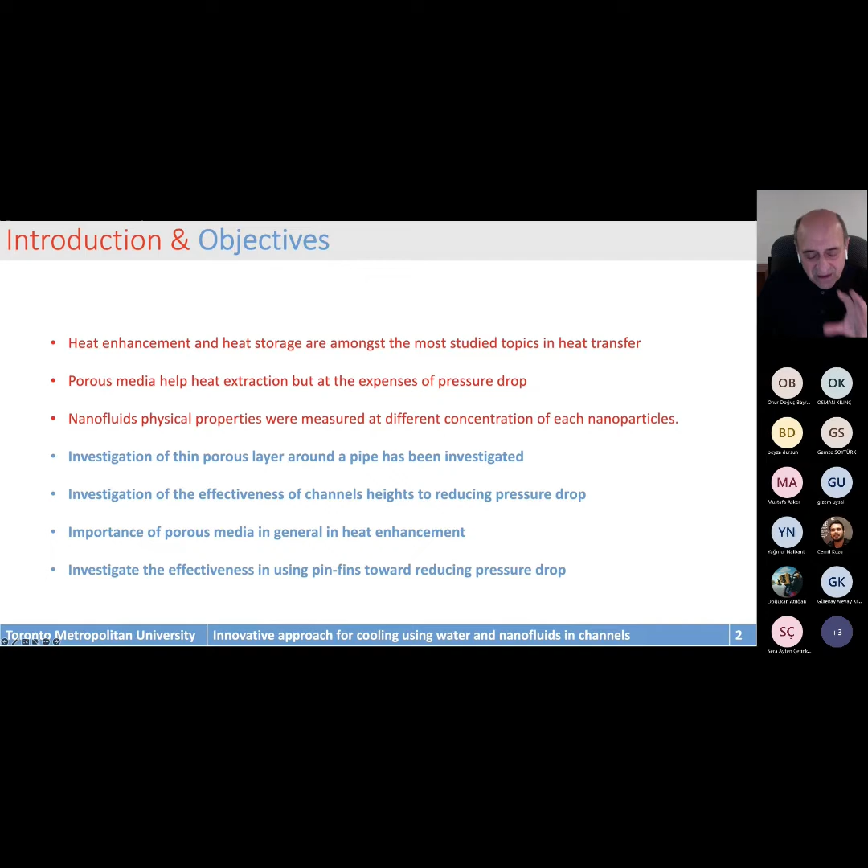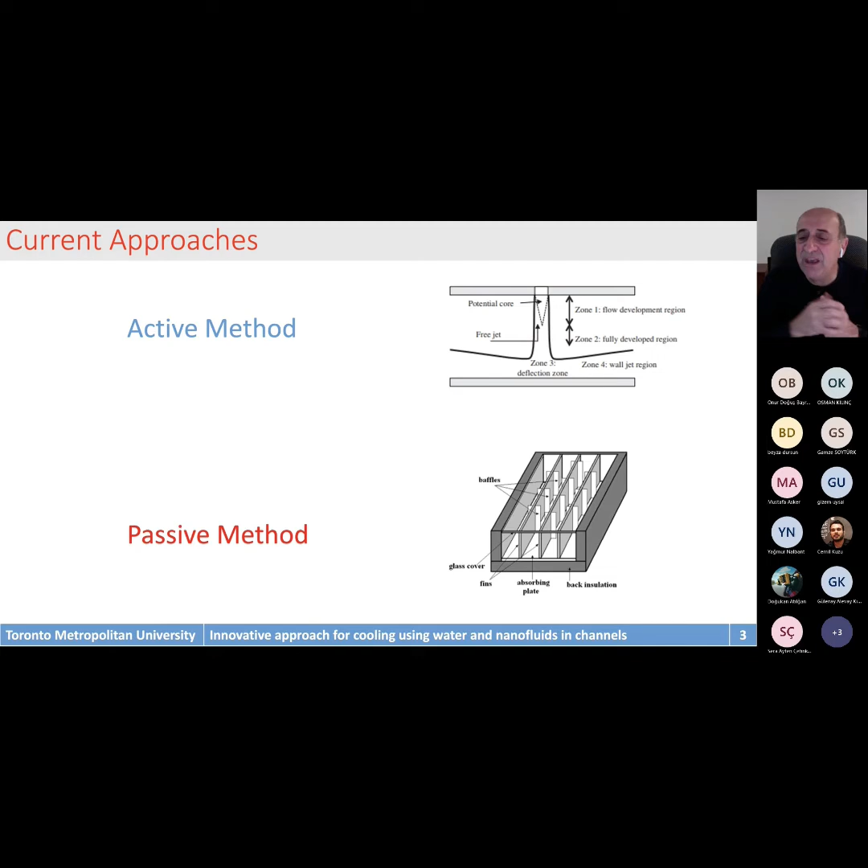Just a quick reminder, there are different types of methods for cooling. The active method, one of them, is jet impingement, and this is what one of my PhD students is doing right now. They use jet impingement in order to cool a certain surface. The fluid could be water or could be nanofluid. Or we have the passive method where we use some fins and let natural convection take away the heat from a hot surface.

Now, on the active method, people have used jet impingement with channels, whereby the channels act like fins or mini channels. They take the heat away from the bottom of a surface, and then the jet impingement cools them down. Or instead of putting channels, they use porous medium. You can use porous media with high permeability and be able to extract heat using this technique. Or with the passive method, you let it go by itself again using natural convection.

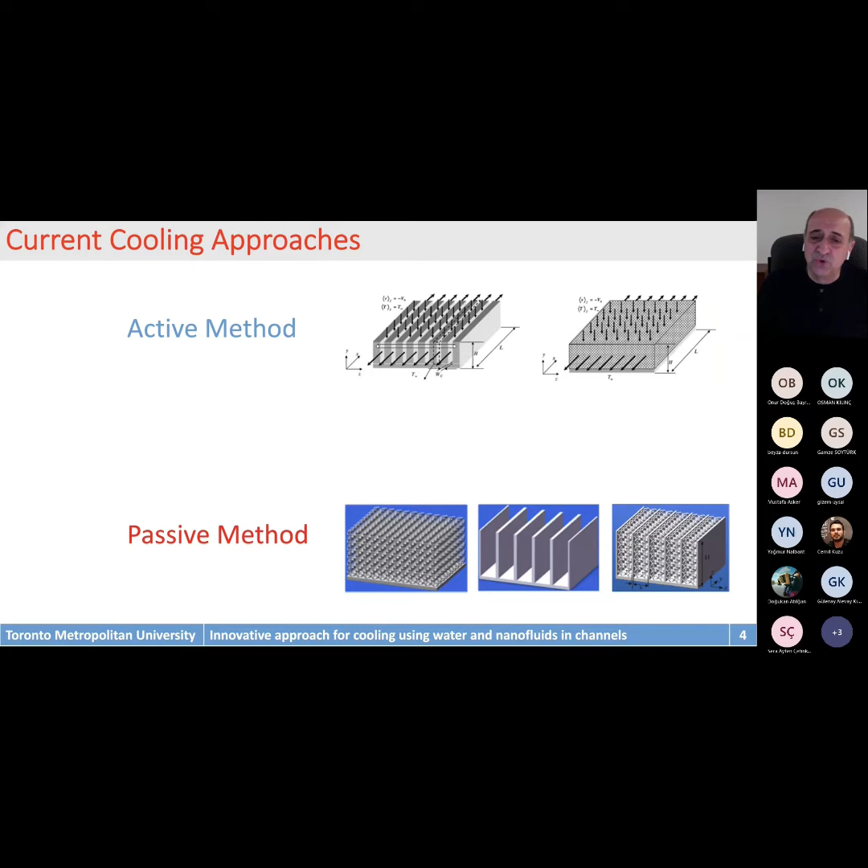However, more and more we see more interest in rapid cooling. Therefore, forced convection is the suitable approach for this particular application.

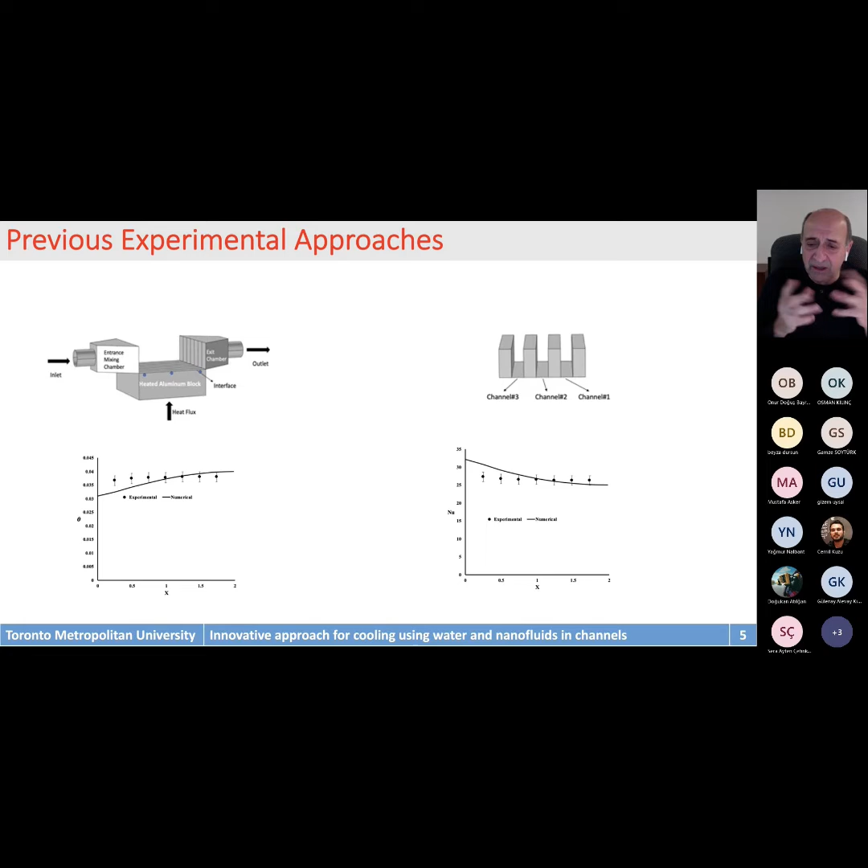We've done some experimental work in channels, with the channels having 5 millimeter openings, and the dimension of the experiment, which you see on the left-hand side, is equivalent to a computer chip, 3 centimeters by 3 centimeters. So we've done some numerical and experimental work for those particular cases of channels, and we had good agreement between the experiment and the numerical, which helped us calibrate our code. Usually for our numerical part, we use COMSOL software, which is a commercial software available in universities.

We also put inside those channels some porous media, and then we did some experimental work as well. Again, with porous media, depending on the permeability—here it's aluminum, and the porosity is 0.9—we were able to extract more heat than with regular flow in a channel.

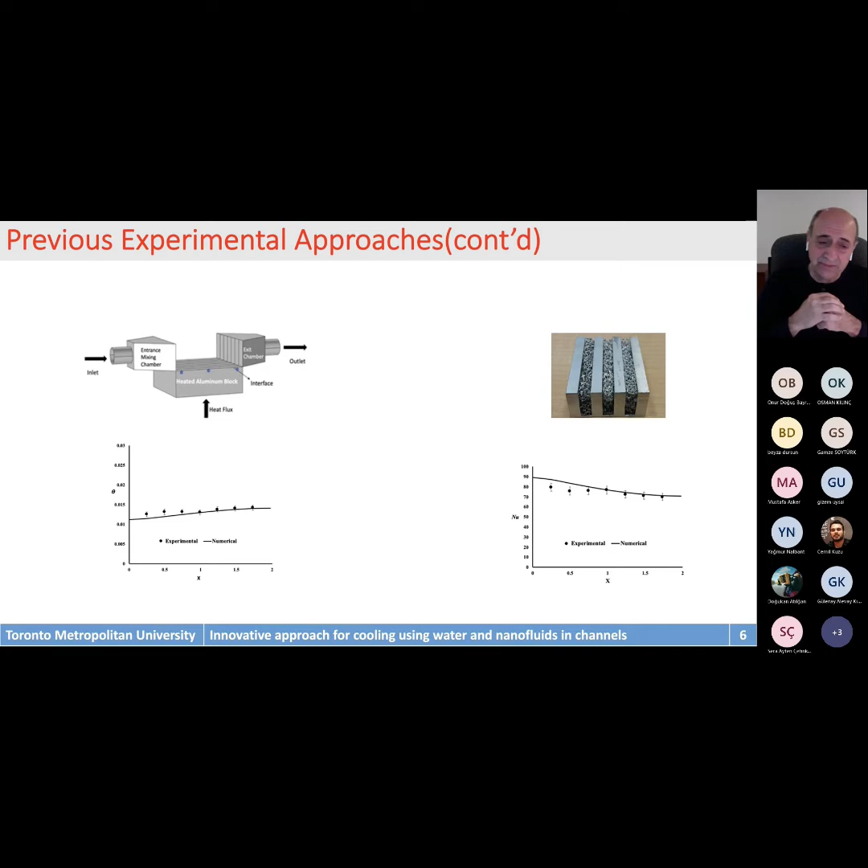Then from there, I would like to start taking you slowly into the four studies which we did. One of them, we tried to use nanofluid, and here the nanofluid we use is aluminum oxide with water, and we had different types of applications.

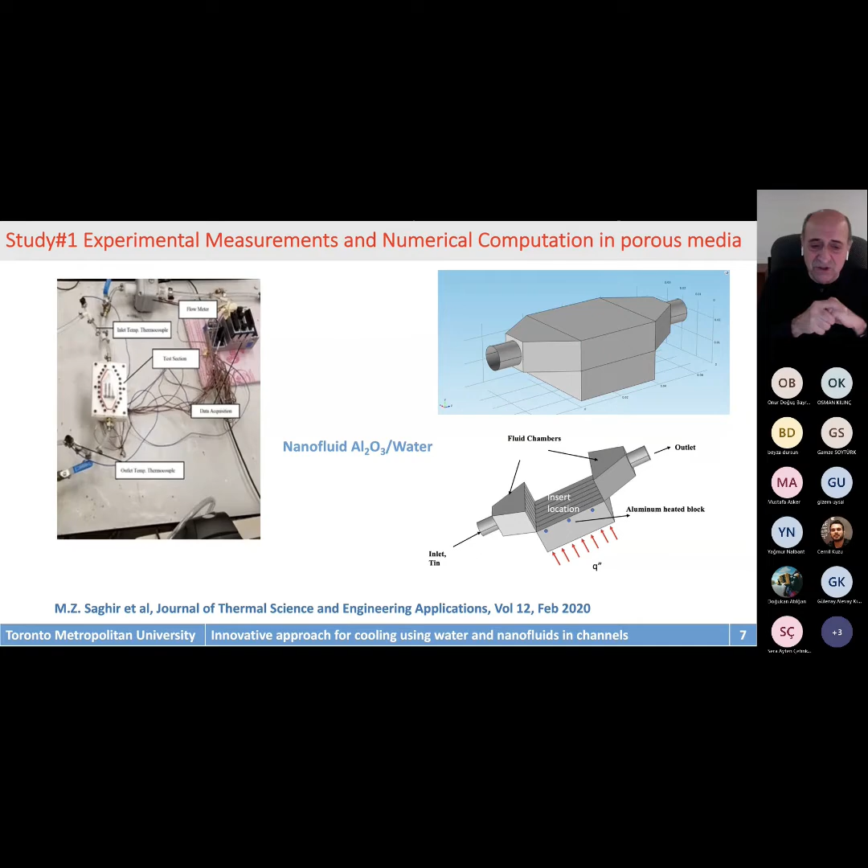One of them is the porous channel, which I showed you earlier. In this particular one, it's a porous block, 3.7 centimeters in both directions since it's square, and the height is 12.7 millimeters. The work for this one has been published in the Journal of Thermal Science and Engineering Applications, so I'll go into detail with this one.

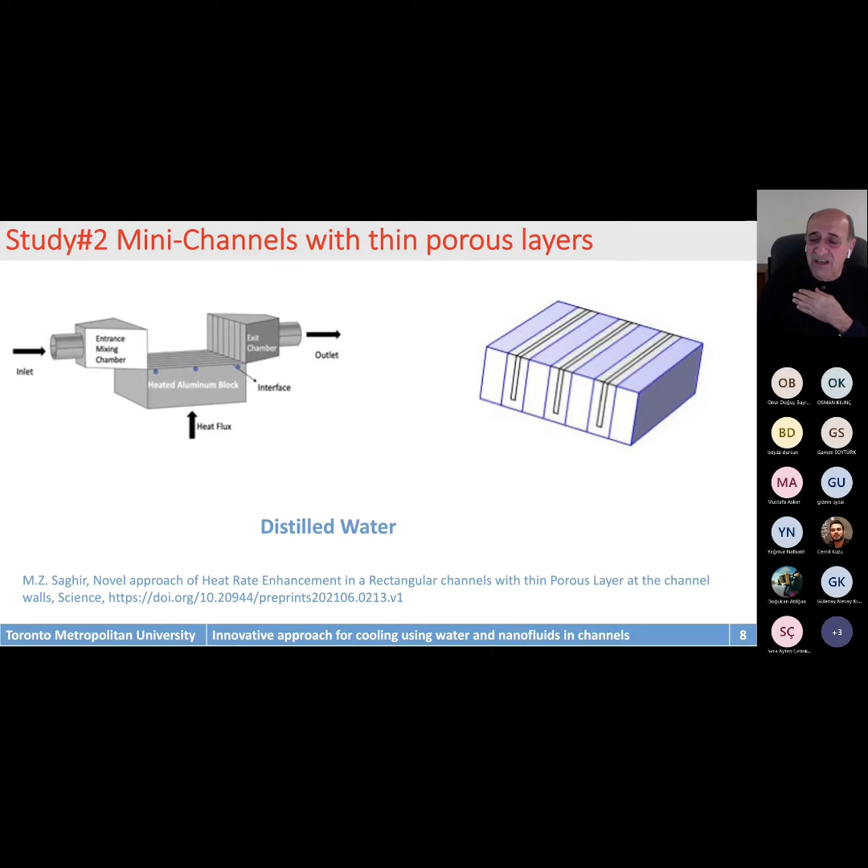The second study is where I reduce the channel by putting a layer of porous media at the side of the channel. The reason behind it is I want to reduce the pressure drop, because a porous media creates a pressure drop. This one was purely numerical, after we calibrated our code with experimental data, and we published it in a Science journal not long ago.

The third study: we said, if pressure drop is the problem, what about instead of using channels, we use pin fins, circular or rectangular, which form channels by themselves. The reason behind this study is I would like to allow the flow not to go only straight through the channel, but circulate between the pin fins, with the hope that this approach creates more heat enhancement. That's the goal of the study. We published a chapter in a recent Taylor and Francis publication related to heat enhancement.

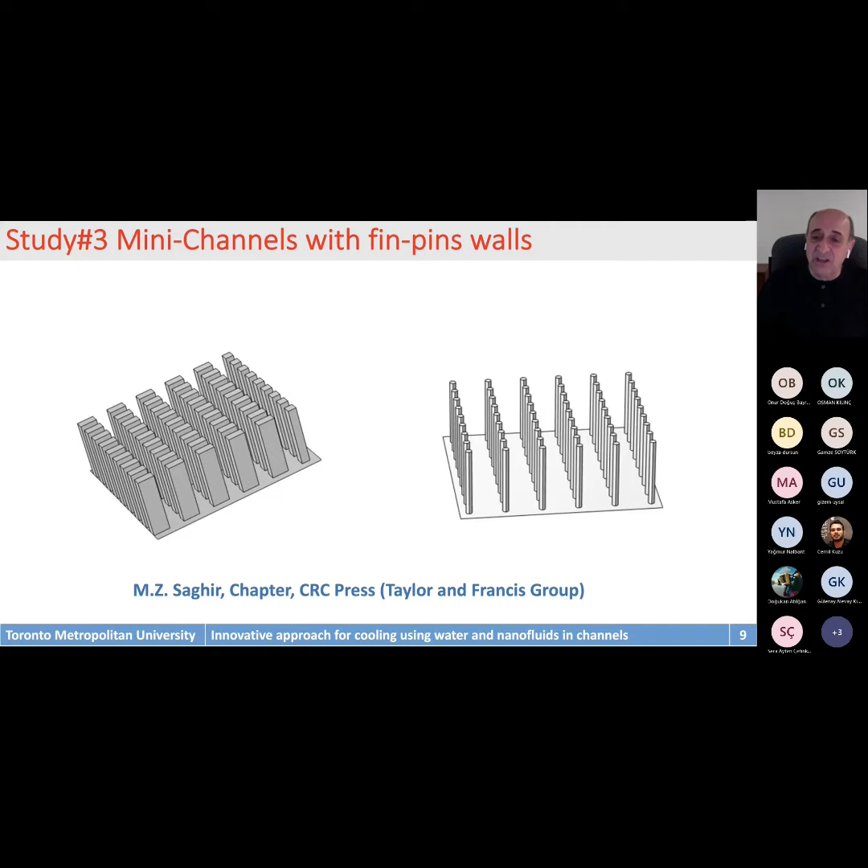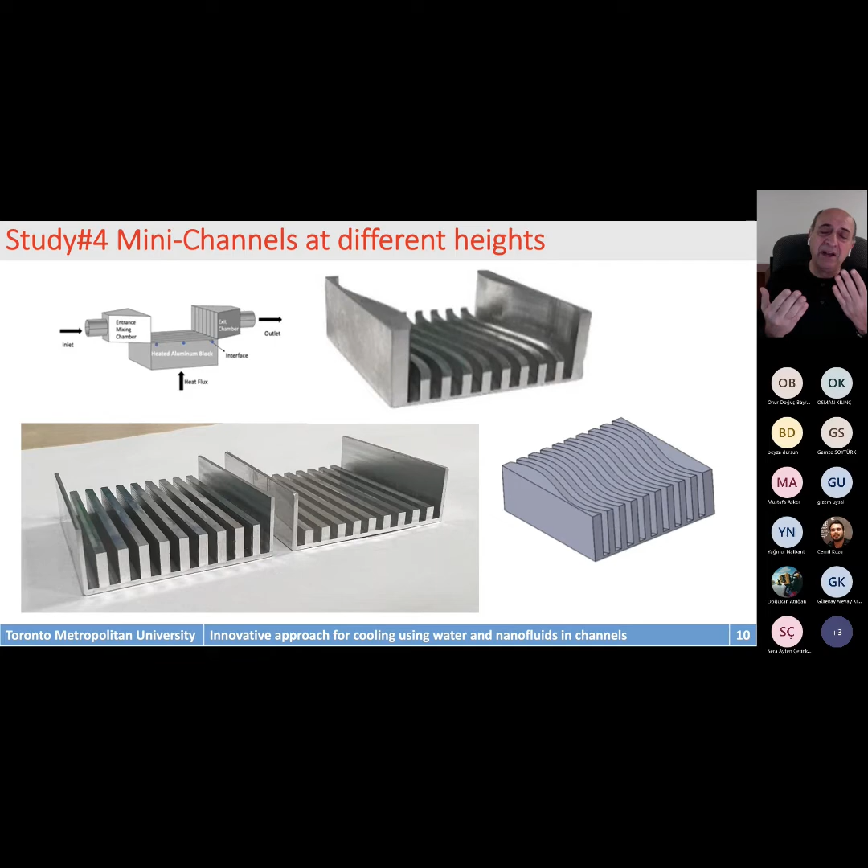The fourth study, which we are currently doing, is about the height of the channel. Although the cavity where the flow circulates remains constant, I would like to vary the height of the channel to see if there's an optimum height we can benefit from. We are doing two types of experiments: wavy channel and straight channel, both made of aluminum. I'm also showing you the model, which we are doing numerically, so in parallel we do experimental and numerical work.

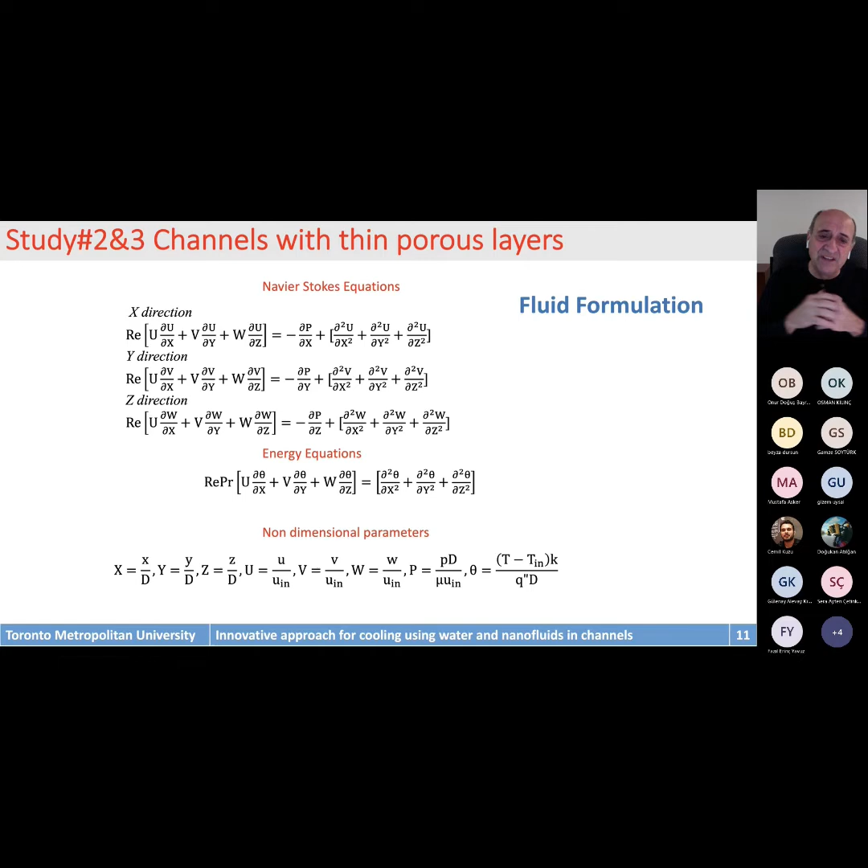For the numerical side, I won't go into detail, but basically we solved the full Navier-Stokes equation in three dimensions, and for the porous formulation we used the Darcy-Brinkman model.

I'd like to stop for a second and show you a future project we're doing now, running experiments as we speak. Instead of buying a porous material and telling the numerical model we have a porous equation, we use 3D printing. Working with the architecture department, we designed a porous medium, did a 3D print of it, and now we are doing experiments with that.

On the numerical side, you don't need to solve the porous formulation. Instead, you select the model as being solid, with openings between the solid where the fluid circulates. This is a new approach to dealing with porous media, and I'll go into a bit more detail at the end, since we don't have data yet.

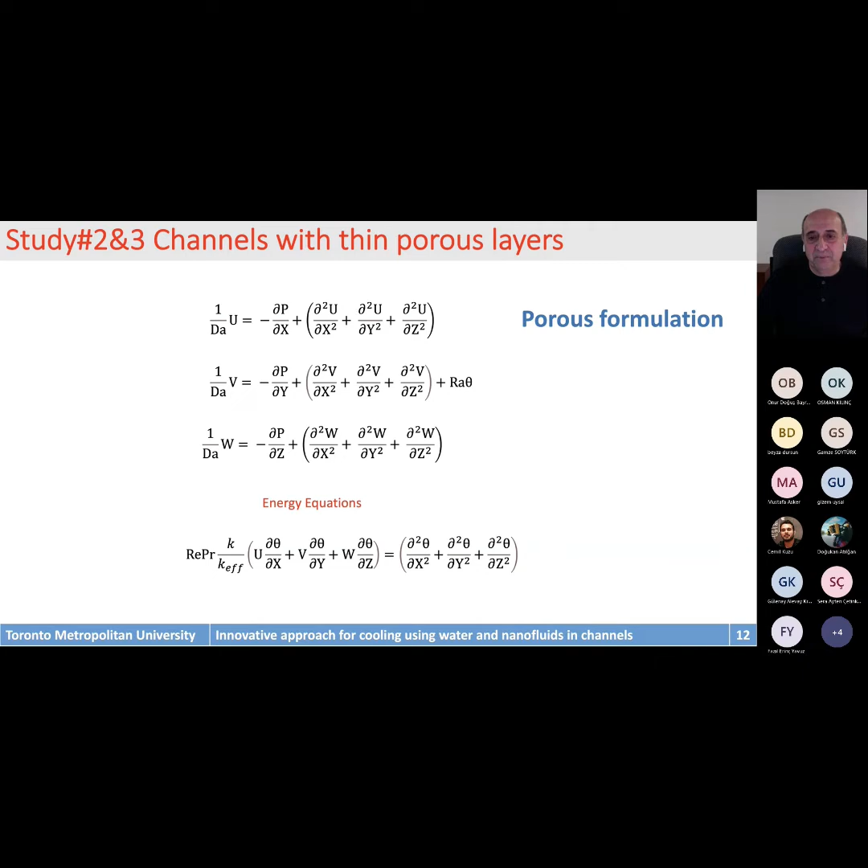Now, regarding study number 1, we did experimental measurements for different heat fluxes. To remind you, study number 1 was a porous block. This porous material can be bought from industry with a porosity of 0.91 and different permeabilities depending on what you need. We selected 10 PPI, 20 PPI, or 40 pores per inch, and tested different flow rates.

One important thing to mention: when you put the porous block onto the hot plate, we usually apply thermal paste to ensure good contact between the heated block and the porous block. However, in numerical modeling, you must model this interface, and by doing so, you can calibrate your thermal resistance for one case and use it for the entire correlation between experimental and numerical results.

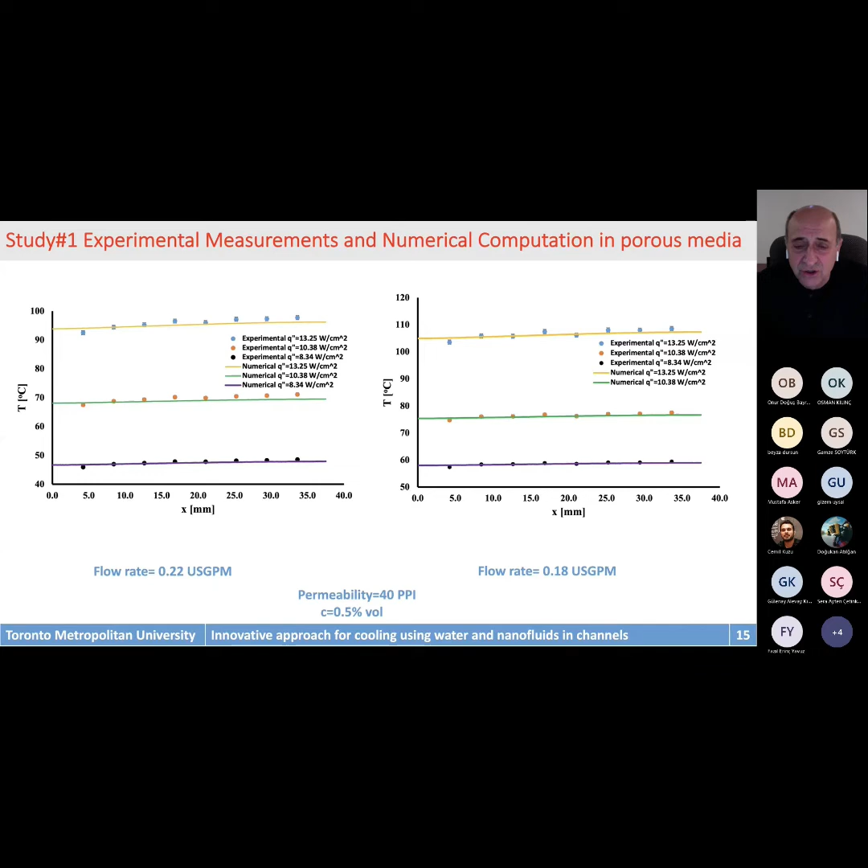We also did it for a variety of nanofluid nanoparticle concentrations, between 0.1% and 0.5% volume. One thing to remember is when you use nanofluid in your flow, after finishing your experiment for the day, you must clean the system. If you don't clean it and clean the porous block you're using, you will have blockage, and the nanoparticle will be very difficult to remove from that blockage in the porous material. This is something you need to take into consideration in your experimental work.

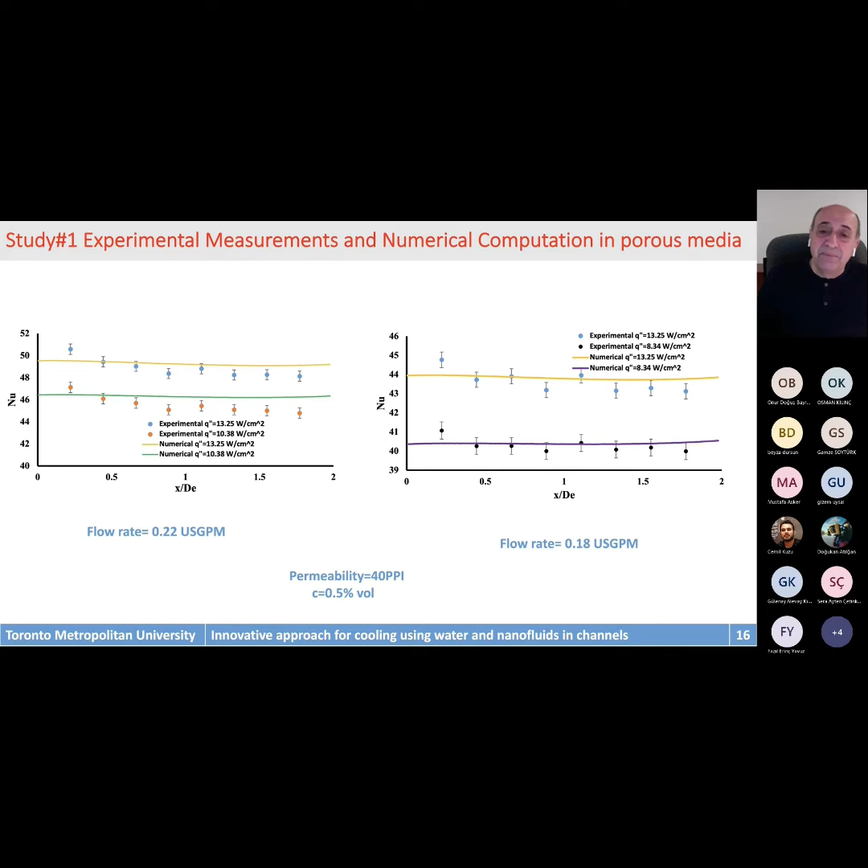Also, we increased the permeability from 10 ppi to 40 ppi, pores per inch. By increasing the permeability, the flow behaves slightly different in an unorganized way, and the discrepancy between numerical and experiment becomes obvious. This leads us to believe that the new trend for modeling flow in porous media numerically is not to use Darcy, Brinkman, or similar formulations, but to use AutoCAD or similar software to model the porous media yourself, then treat it as a solid in the numerical model. You still solve laminar flow, but the porous media becomes a solid block. This is what we are doing now to avoid discrepancy between numerical and experimental results.

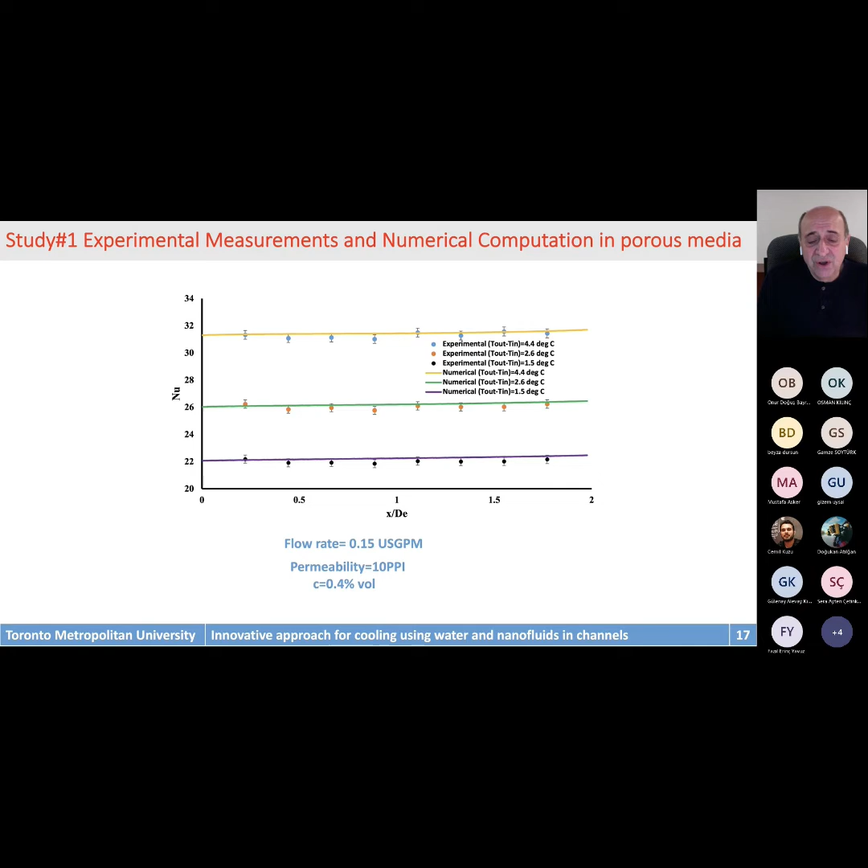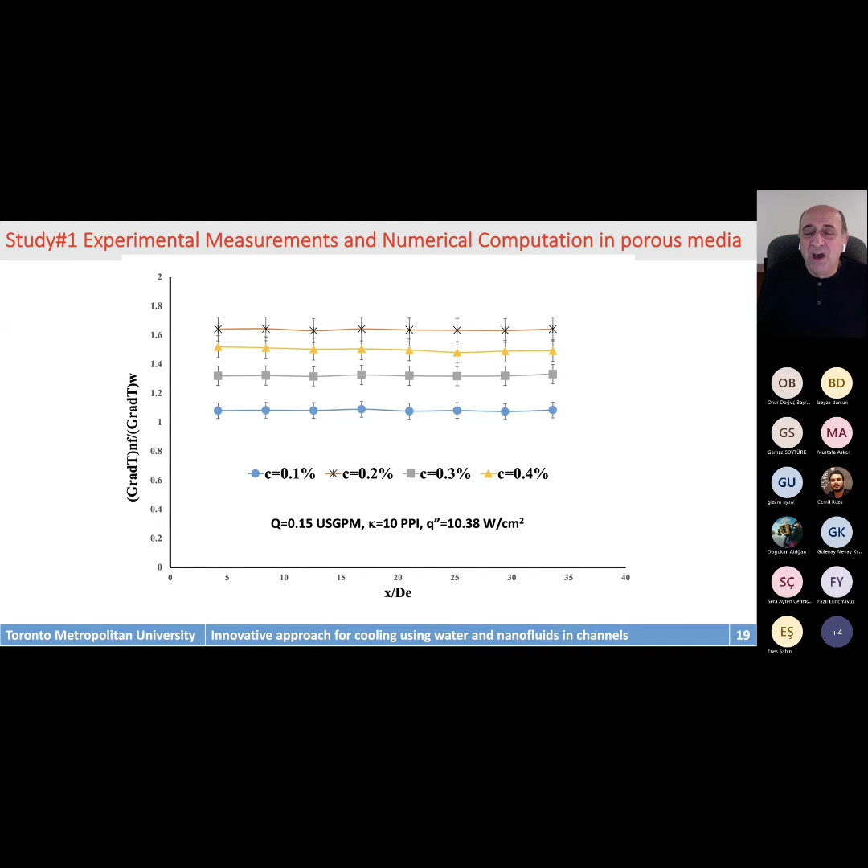We repeated this experiment many times for different heat flux values. This is another value of heat flux and another permeability, and again 0.2% removes heat better than the other concentrations. I repeat, this has been detected by some experimentalists, but you hardly see it reported in other publications. Here I'm showing the temperature variation, and you see that for 0.2% the temperature variation is lower than for 0.3%, 0.4%, and 0.5%.

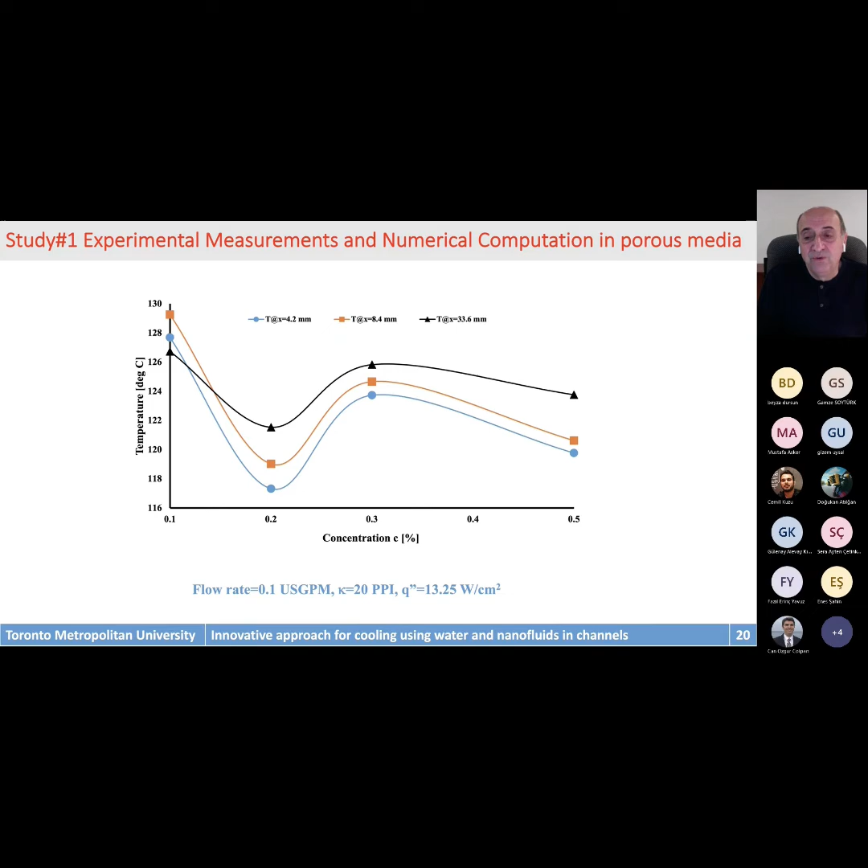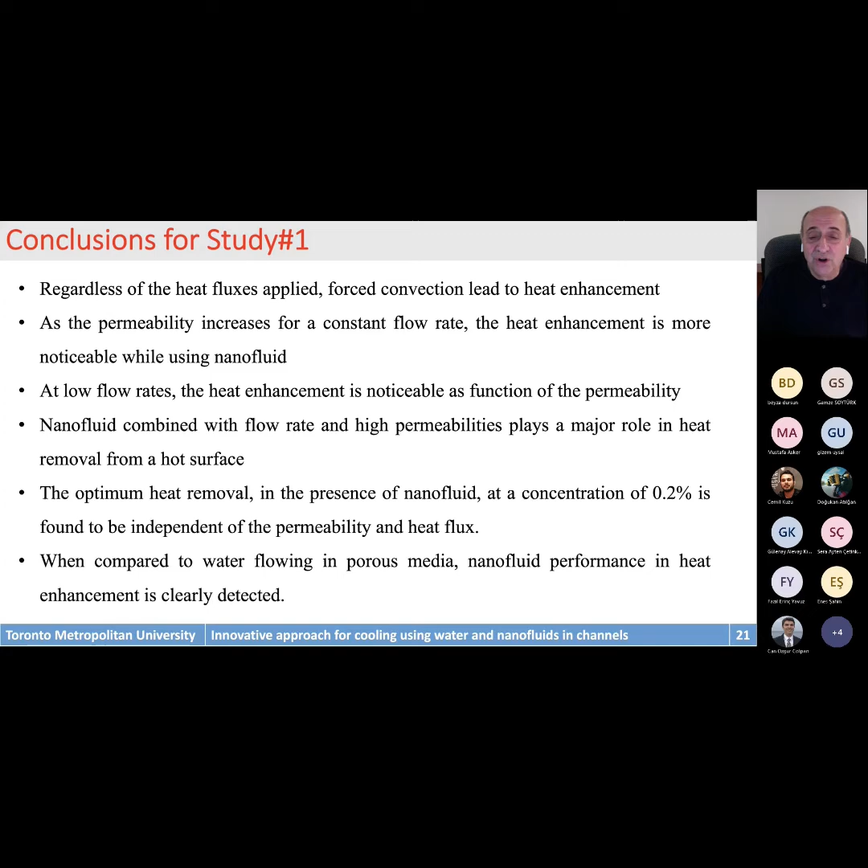We published this finding in the Journal of Porous Media and other journals. The message for this exercise is: when you do this experiment, nanoparticles tend to sediment inside the pores, so you must check that the porous media is always clear of obstacles. For us, 0.2% gave better performance than 0.3% or 0.4%, which is actually good, because it reduces pressure drop, and on the other hand it reduces sedimentation or blockage in your channel or porous media.

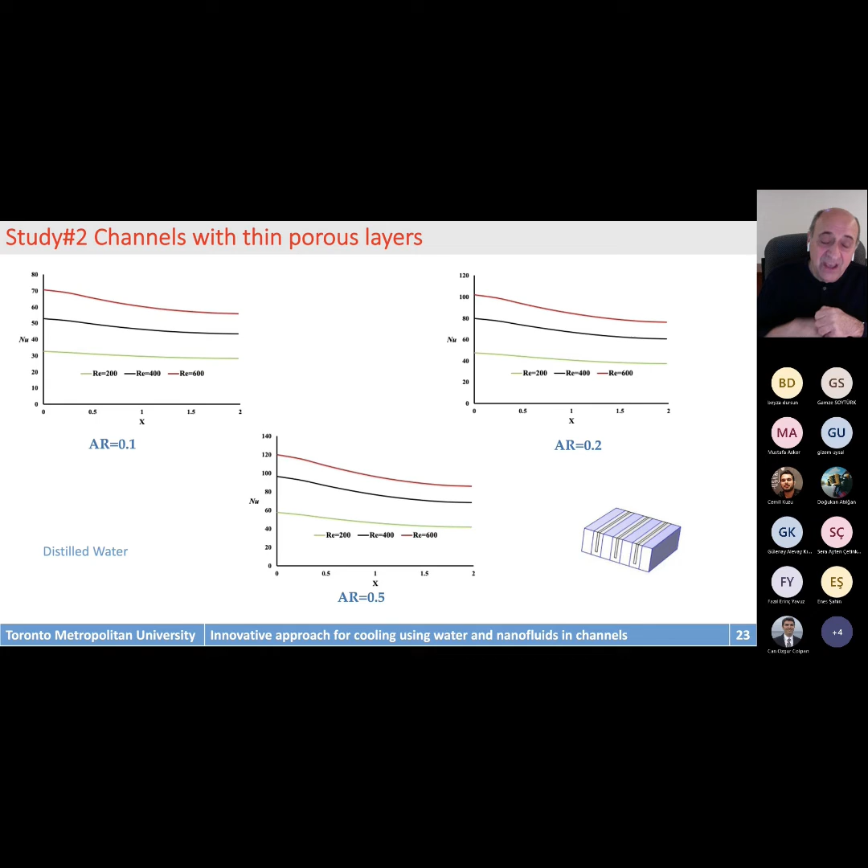Moving to study number 2: after calibrating our numerical code with the experiment, we studied the effectiveness of using a thin layer of porous channel at the wall instead of a full porous channel, leaving a gap for the free fluid to circulate. From this exercise with water, we discovered that the pressure drop plays a major role in improvement compared to a full porous channel.

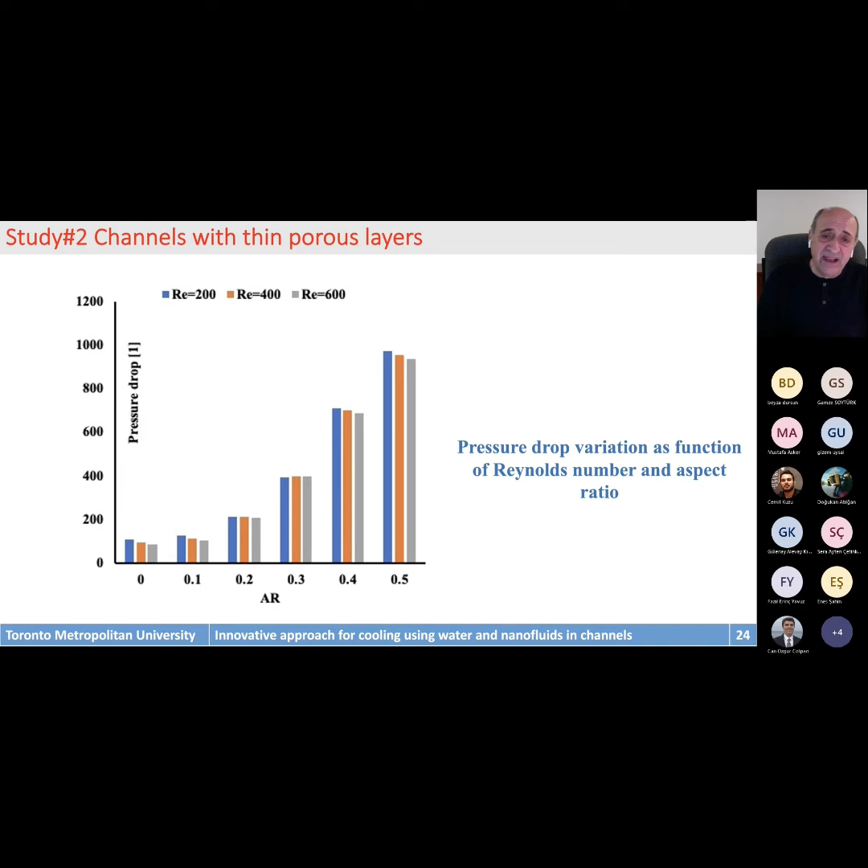One way to observe that is with aspect ratio equal to 0, meaning no porous media, versus aspect ratio equal to 0.5, meaning the porous media fills the entire channel. Between them is the aspect ratio where we have a certain thickness of porous media. The pressure drop is consistent with the thickness of the porous media in the channel, and it varies as the flow rate or Reynolds number changes.

However, we discovered there is an optimum thickness of porous media in the channel that provides the best performance evaluation criterion. This criterion is basically a ratio between the average Nusselt number and the pressure drop or friction factor, raised to a power of 1/3. Doing this, we found that the best performance occurs when the aspect ratio equals 0.2, meaning a thin layer of porous media around the wall of the channel, which improves heat enhancement.

On the other hand, it also has an optimum pressure drop. So the ratio between both of them gives the best candidate aspect ratio, equal to 0.2.

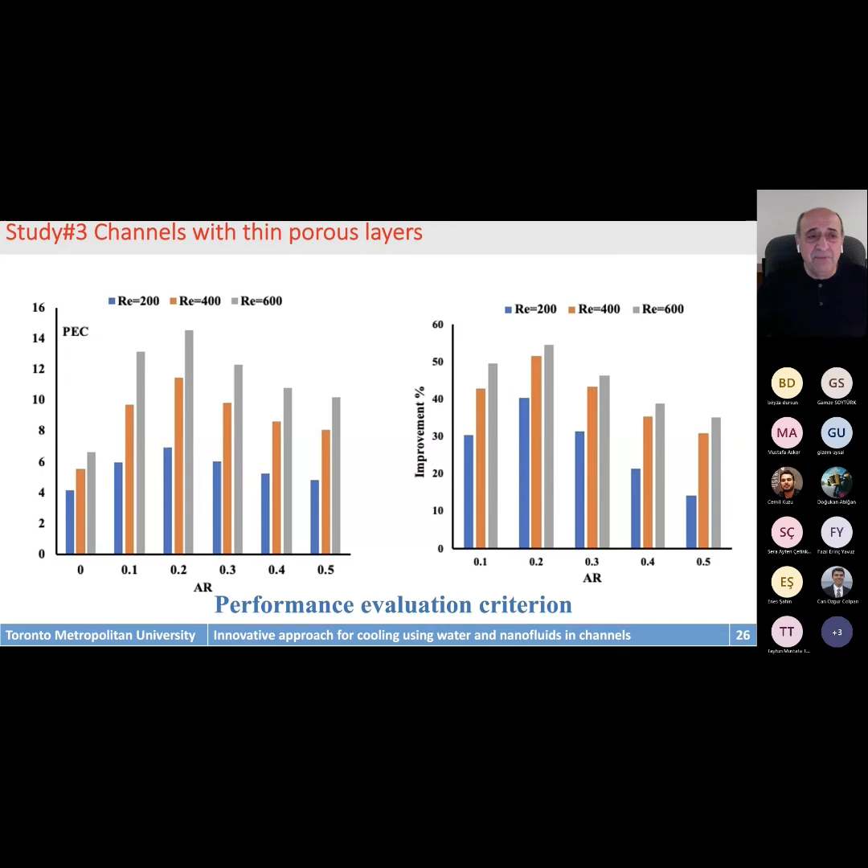This is a purely numerical model after we calibrated the experimental work. The performance evaluation criteria is an important parameter to take into consideration in this kind of analysis, because we don't want good heat enhancement but huge pumping power, since this defeats the purpose if we want to scale down our experiment.

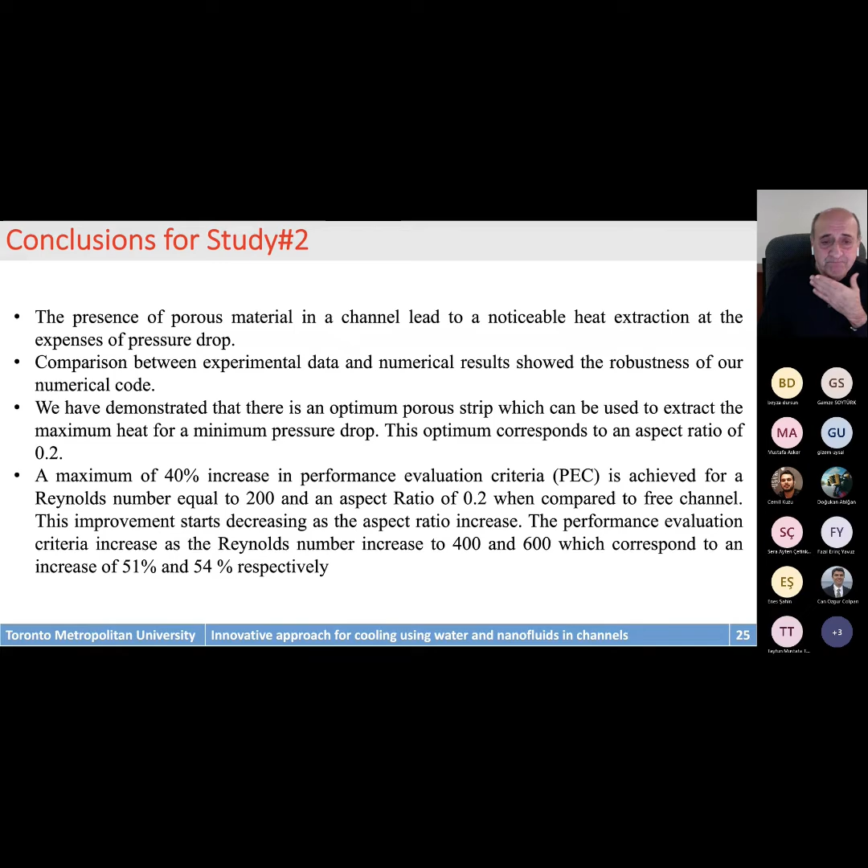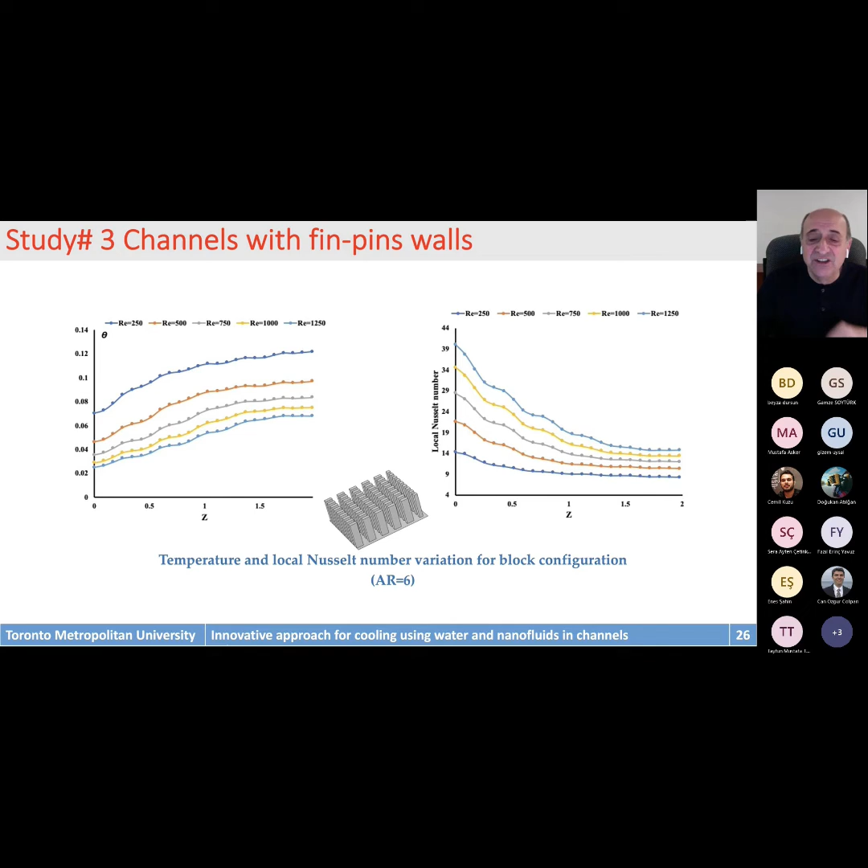We also did it for a circular pin fin, and the idea behind the circular versus the rectangular pin fin is that with the rectangular pin fin, you create more friction. By creating more friction, we may have a higher pressure drop than for a circular pin, because flow around a circular obstacle has lower friction, therefore lower pressure drop.

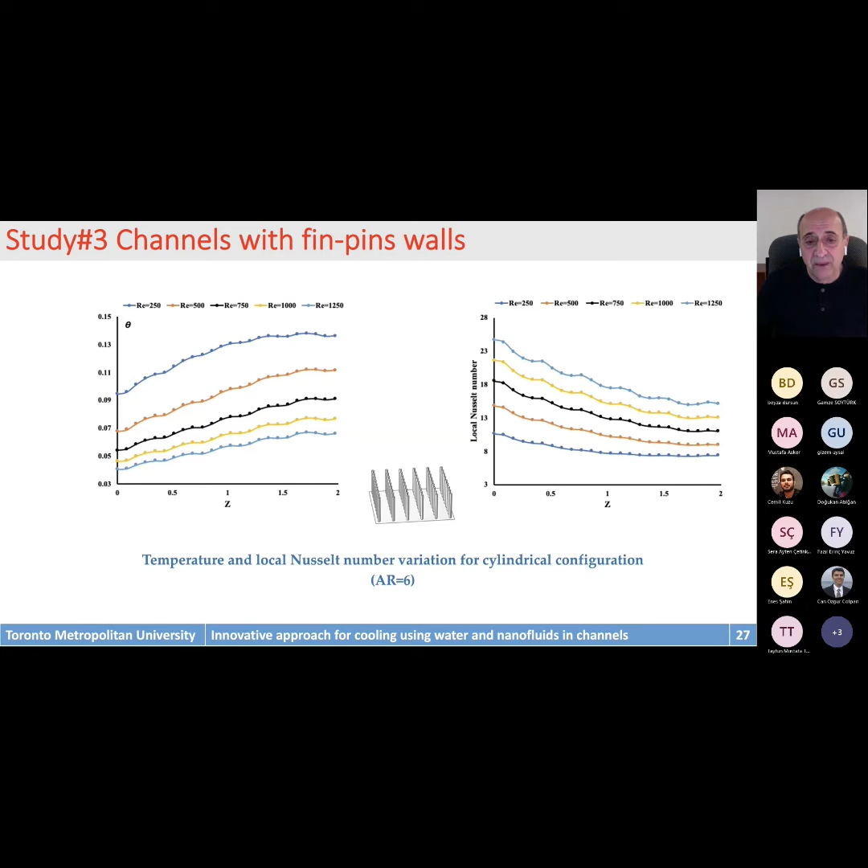One thing we did in this study was vary the height. By varying the height, we are encouraging the flow to circulate above the pin fin, and for the flow to circulate between the pin fin, and then they mix. We love to have mixing, because mixing will enhance the heat transfer without switching to turbulent flow.

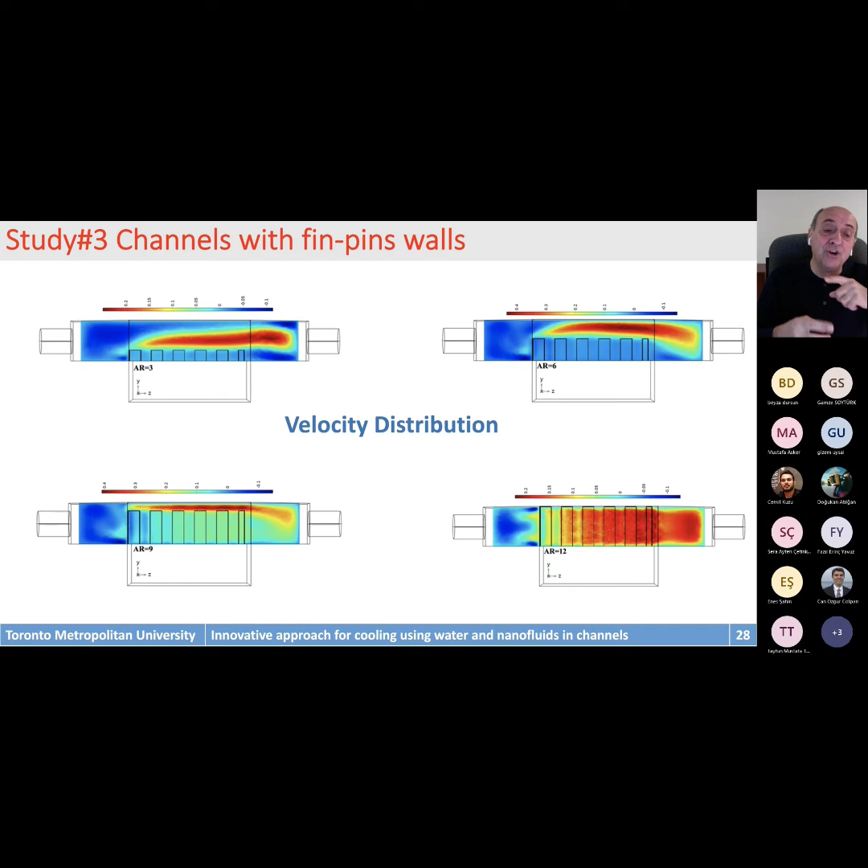This is obvious from this particular case, whereby when you have a full height pin fin, flow follows a certain pattern like a channel. However, when the height is changing, we see some circulation on the top and on the side.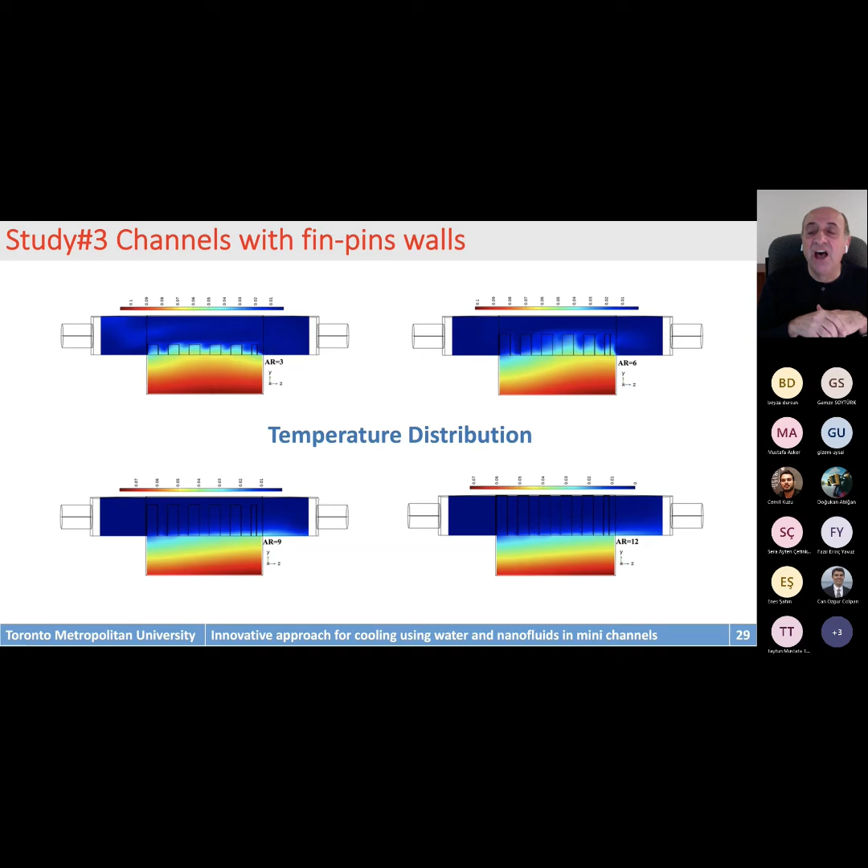So this attracted our curiosity, and this is the reason why in one experimental study, we varied the height of the channel and the height of the pin fin. When you look at the average Nusselt number, you see, of course, the better performance is when...

...the aspect ratio is 12, meaning the fins are at full height, but they still have a little bit of escape from the top for the flow to penetrate.

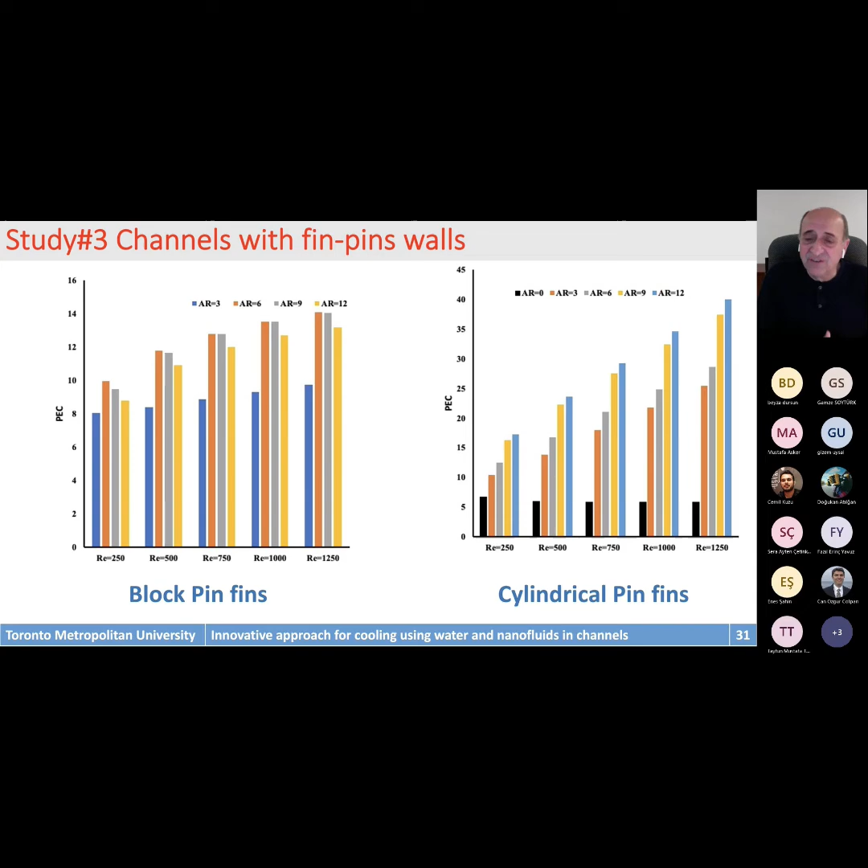But when you do the performance evaluation criteria, we notice that the block pin fin is doing good performance, but not as good as the cylindrical pin fin. The reason is the friction factor in the cylindrical pin fin is less.

So this is the finding. And then, what we also found when we looked very carefully at the data, is that there is an aspect ratio for which the performance is better for one or the other.

Basically, the height can help in creating mixing between the flow going above the pin fin and the flow going between the pin fin and reaching the top. This mixing can improve the heat extraction.

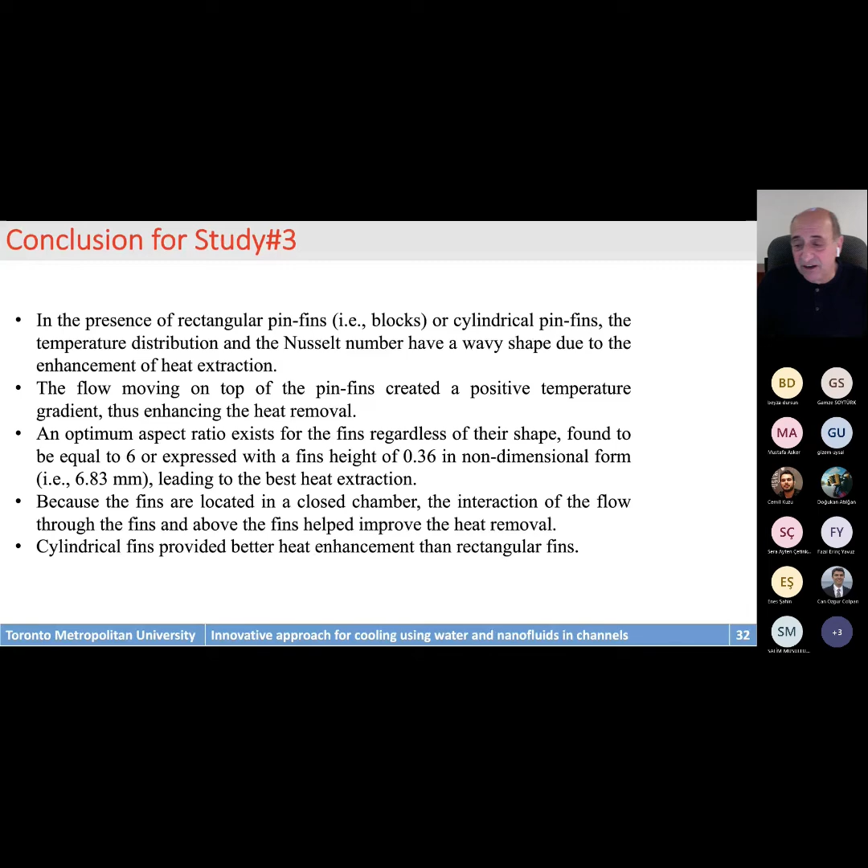And of course, as you can see, we have a discrepancy here with the experiment. We don't know why yet. We are still investigating. So we did the study for low flow rate, 0.3 US gallon per minute, and 7.5 millimeter height.

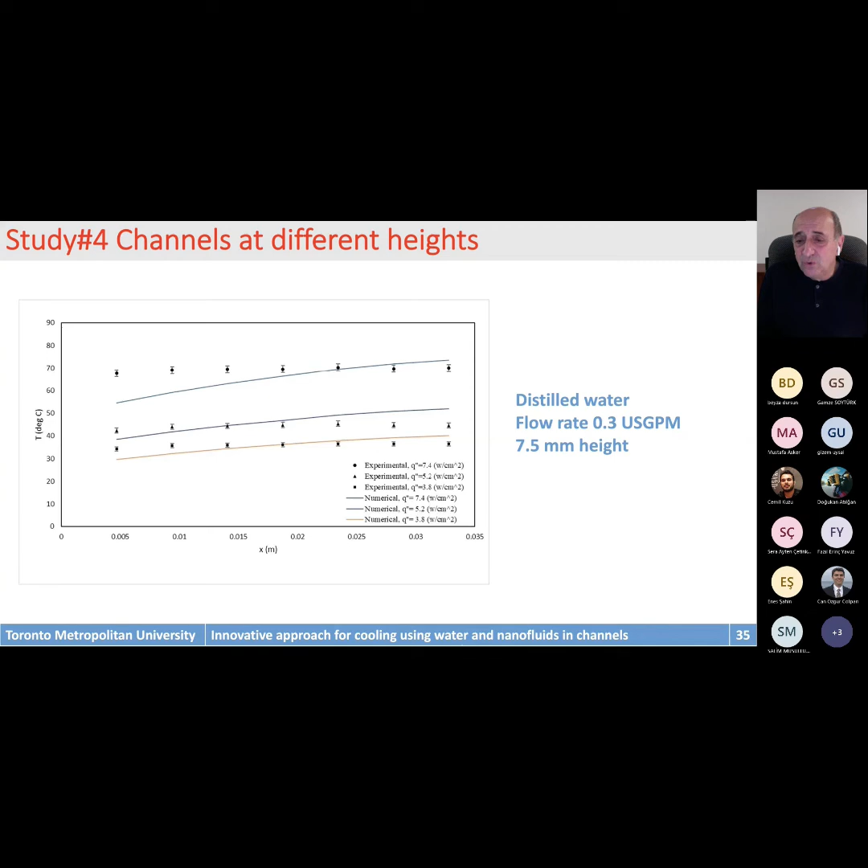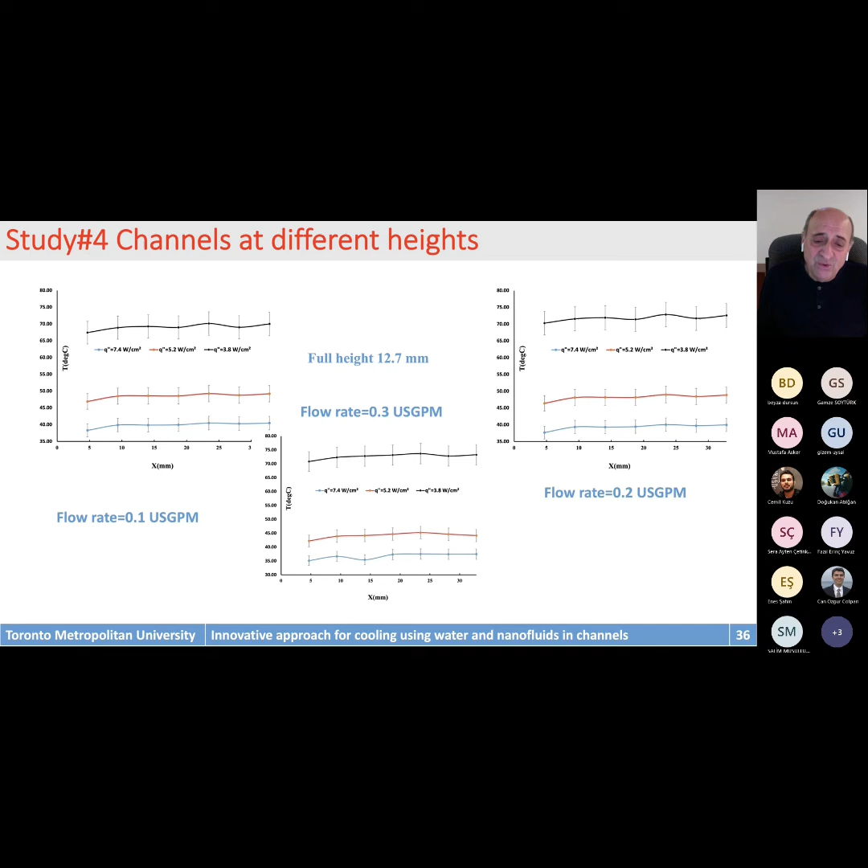Then we increased the flow rate to 0.2 and 0.3. Then we tried to do it as well for full height, 12.7 millimeters, at different flow rates. We have a kind of agreement between experimental and numerical results.

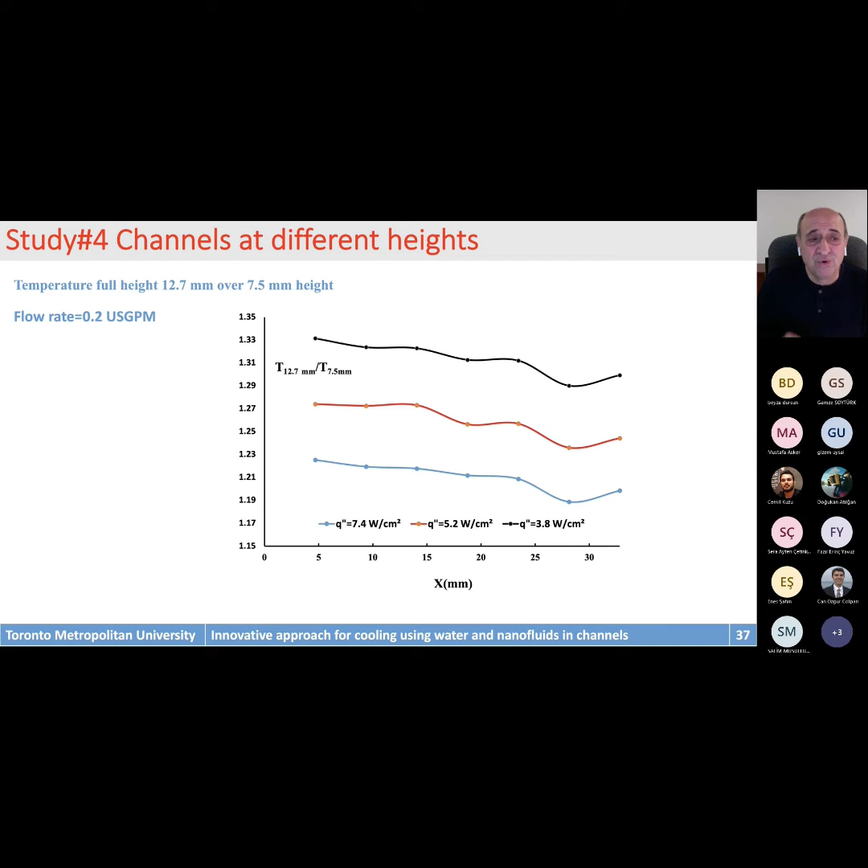When you look at the temperature between the 12.7 millimeter and the 7.5 millimeter cases, we notice that at 7.5 millimeter, the performance is slightly better due to this mixing. But again, this has to be checked very carefully before we judge, before we come up with a final conclusion.

The recent work which we are doing, numerically, uses a convergent-divergent channel. Up to now, we have been using a straight channel. So we use this model whereby we allow the flow to go through convergence and divergence.

What we notice is that the convergent channel is a good way to use because the flow starts very slow, and this is the place where the fluid boundary layer is very thin. As the flow progresses, the boundary layer increases, but because it is a convergent channel, the velocity increases, destroying part of the boundary layer as it leaves from the other end.

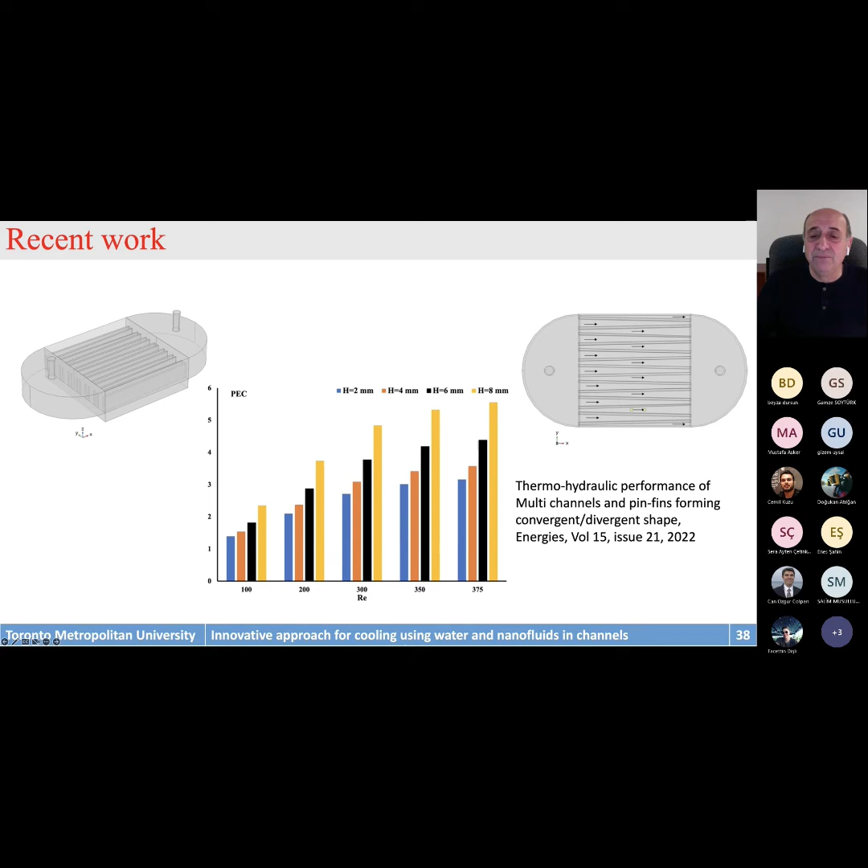Professor Ho did some experimental work which we compared with, but in his experiment he did not have a divergent, only a convergent channel. Here we allow both, but we noticed that the convergence is the most effective. We also tested different heights, and we noticed that a height of 8 millimeters gives the better performance evaluation criterion.

The second project, which we just finished, is for wastewater. How can we use wastewater and take the heat from it to store in phase change material located at the top and bottom? This is a nice project because while other people put porous medium or pin fins in the phase change material, instead we focus on how we can improve the flow to provide more heat to the phase change material.

So what we did was put pin fins arranged in a chevron direction, and we varied the chevron height as well. We noticed that there is a certain height of chevron, 5 millimeters, not reaching the top of the cavity, that does better heat enhancement.

It's interesting that in this particular case with the phase change material, the block at the top has convective natural convection because it is heated from the bottom, while the bottom phase change material undergoes a pure diffusion process because it is heated from the top. I just published this recently in the Fluids journal with all the data available.

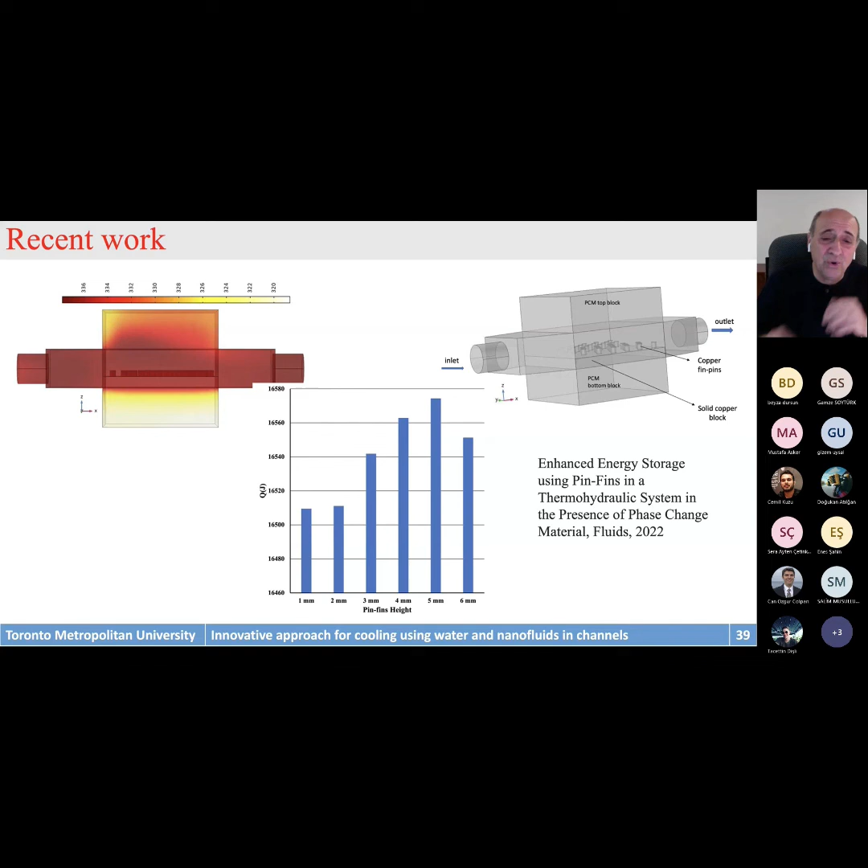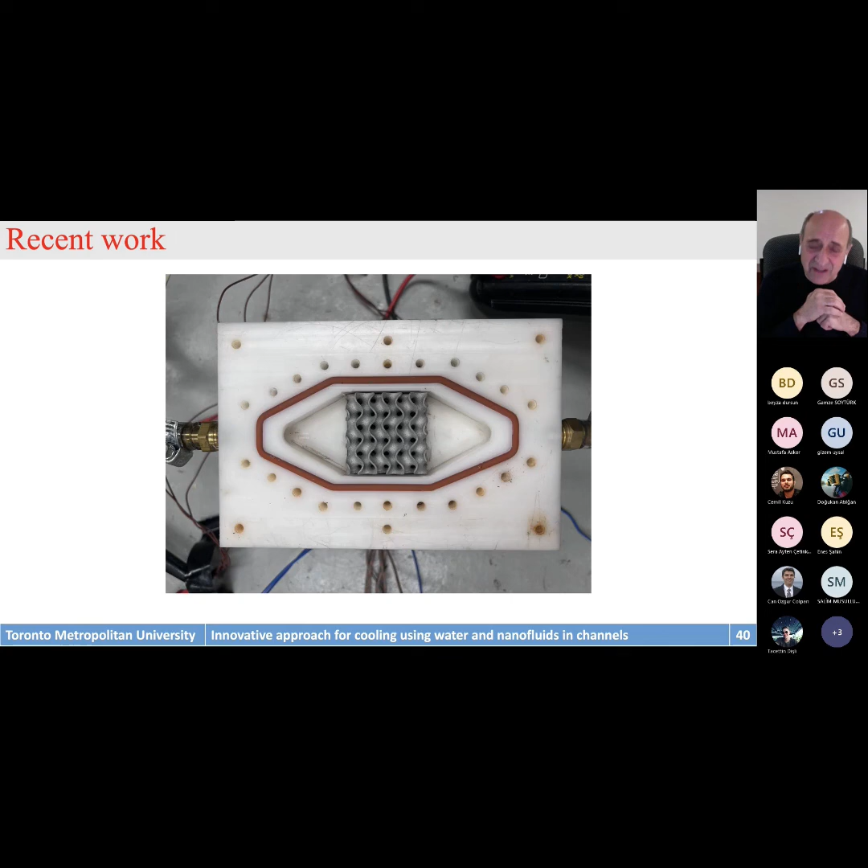We did two types of 3D printing: aluminum printing and silver printing.

We will look at different types of heat enhancement, but we were faced with a tough problem from the numerical side. Although we have the experimental porous media with printed devices, the problem was on the numerical side. When we tried to take the AutoCAD or SolidWorks model and mesh it with finite elements, what the architecture people forgot is that inside the surfaces there were some sharp edges.

When dealing with finite element, sharp edges are not suitable, and it may not perform as it's supposed to. So we tried to modify it slightly and make the curves more smooth, so that finally we were able to solve it numerically with our software very nicely.

And here you see the silver type of porous media. Now we have the capability of changing the permeability and the porosity. And when you do the modeling, we don't need to use Darcy, Brinkman, or Forchheimer anymore. All we need to select in the model is that this is a solid, and the gap between them is where the fluid will circulate.

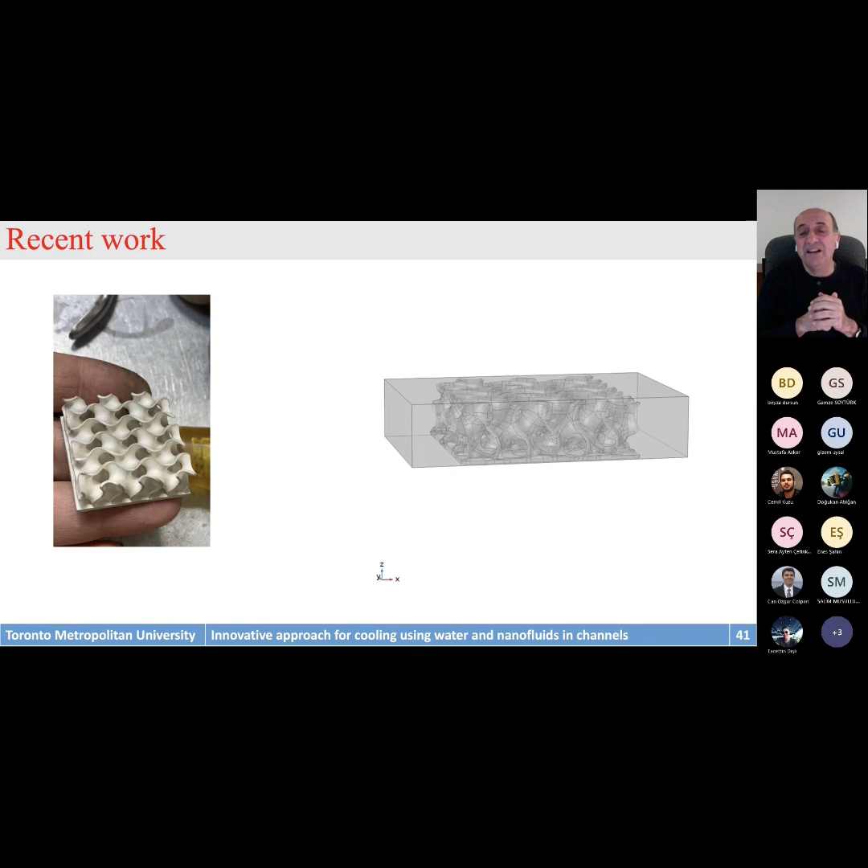So in conclusion, I would like to summarize by saying porous channels are an excellent way to do heat extraction. Channels by themselves are a very good way. Pin fins perform better. What we also did, which is not mentioned here, is put pin fins inside the channel, so on one hand we extract heat from the channel, and the pin fins assist in extracting more heat.

The other thing I'd like to bring to your attention is, instead of focusing on improving the conductivity of the phase change material by inserting porous media filled with phase change material, or by putting pin fins inside the phase change material, keep in mind that by doing so we lose some volume of phase change material.

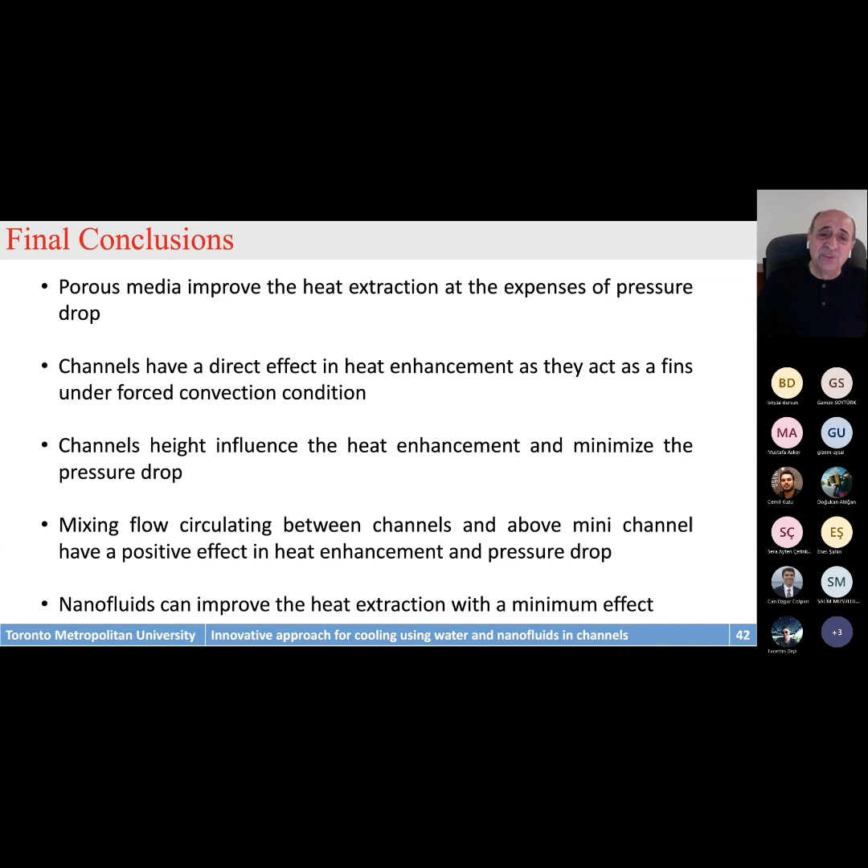Let us concentrate instead on how we can improve the flow and how we can improve extracting heat from the flow to the porous media. With that, I would like to thank you for giving me the opportunity to speak, and I welcome any questions from the audience. Thank you.